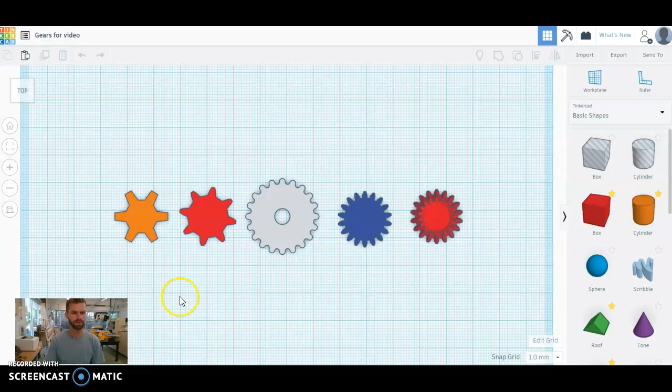When we're making gears in Tinkercad, we're not in basic shapes anymore. We're going to shape generators, go to all, and scroll down. This should be on page 3, unless something has changed. Hopefully it hasn't, and we have 5 different types of gears out here.

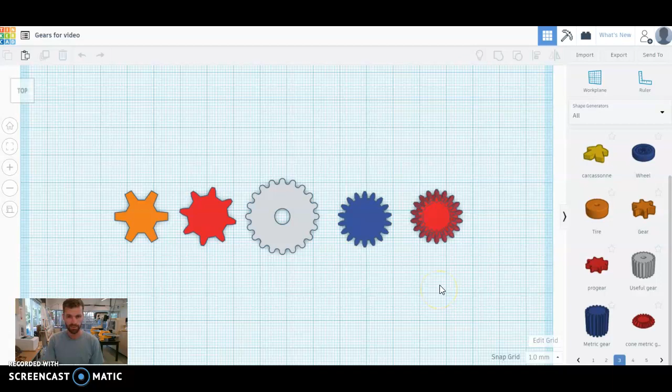You'll see 5 different types here on the right side. Most of these aren't really going to work for our laser cutter. You can see this one on the far right - this is some sort of bevel gear, they call that one. We're not going to get that. We're working in 2 dimensions, so that one's out of there.

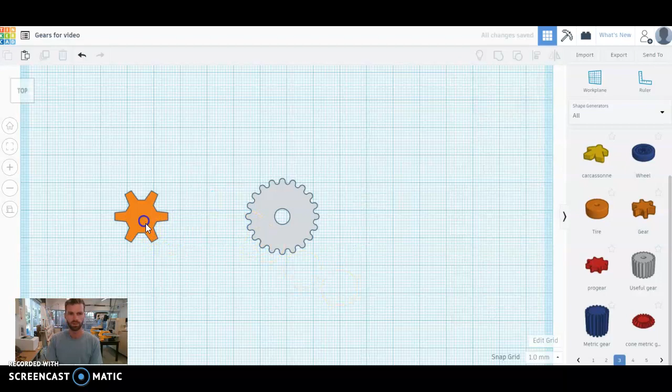That's this cone metric one here. The other ones, they look pretty good, they would work, but they don't have a center hole, so we're going to get rid of those ones too. So the only one we're actually going to be using is this useful gear. The only reason we're choosing this one is because it has that pre-made center hole there, which makes it a lot easier to design with.

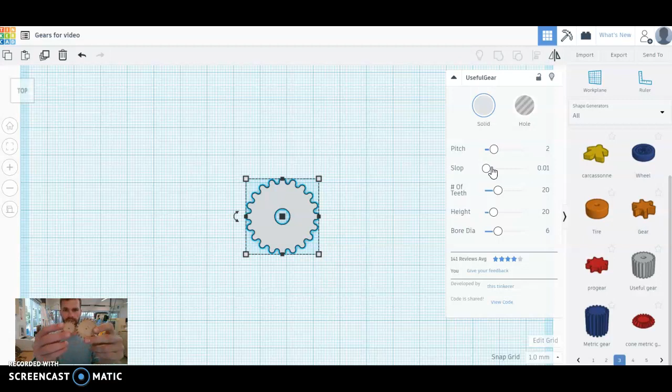Once you pull it out here, we have a couple different things we can play with. The biggest one that we need to keep the same every time is the pitch, that top number. We saw a second ago that certain gears will work together and certain ones won't - that's the size of the teeth. The pitch is controlling the size of the teeth there.

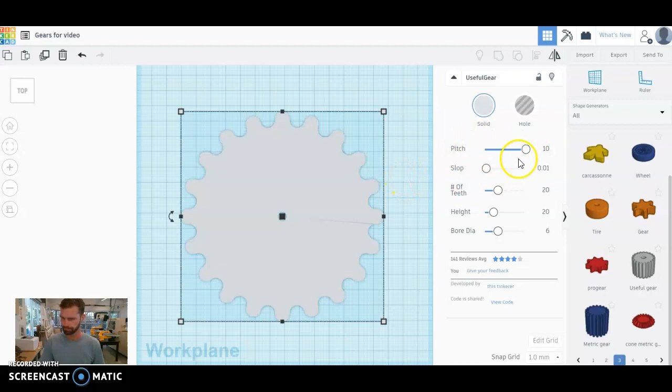So if you want to make a set of gears and you want to set it as 10, you could - just every gear you make needs to have the pitch be 10. In the future, we can look at how to make certain gears work together in different combinations, but for now, whatever you choose, let's keep this a reasonable number somewhere in there, maybe like 4 or 5 or something like that, some number that's in there somewhere.

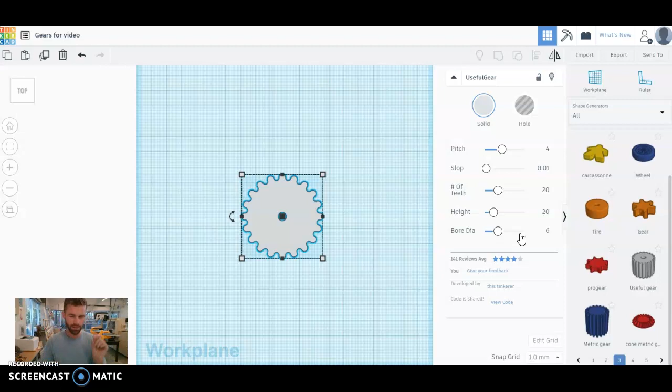We also are going to have some little tiny nails to put in there, which is going to be the bore diameter. You're going to have to measure that. Right now this is in millimeters - this should always be in millimeters. So you have to measure that so that when we put our little thumbtack or nail in there, it fits nicely. It should be a little bit extra - if you measure it and it's exactly 1, make it like 1.2 or something like that. Anyway, you can play with that number right there, and you can see that hole gets bigger and better in different ways.

Height - for laser cutter, that doesn't really matter. That's how tall it is, right? We can see it got taller there when you play with that. Don't worry about that. Number of teeth - this is the fun one, right?

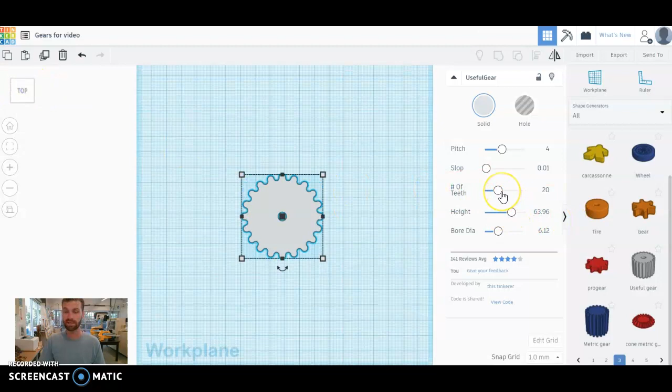So if I make a couple of these, I'm just copying this one real fast. You are going to change how big it is, essentially. If nothing else is changing, you're changing how big it is based on the number of teeth. So this ratio is going to get kind of fun and interesting here as you make a couple different gears.

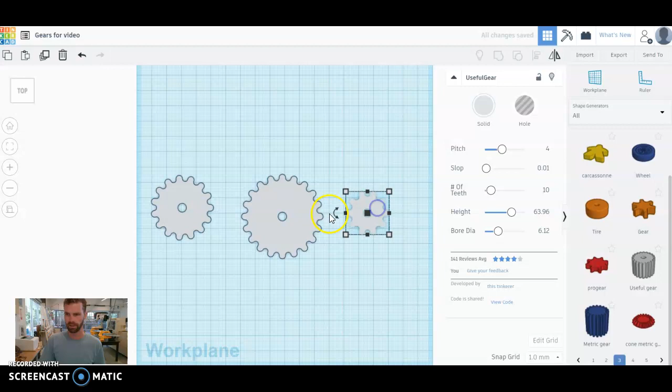And notice I'm going by 5s. These numbers are just ratios, so think like division, right? What numbers go into each other well might be a nice way to start thinking about this. We'll play around with some of these in class and you'll kind of get the feel of what these ratios are going to go and do.

Anyway, for now, that's the basics of it. When you're ready to export, let's tuck these in nice and close, not touching, but somewhere nice and close to each other. And we're going to export, but that's the basis of it.

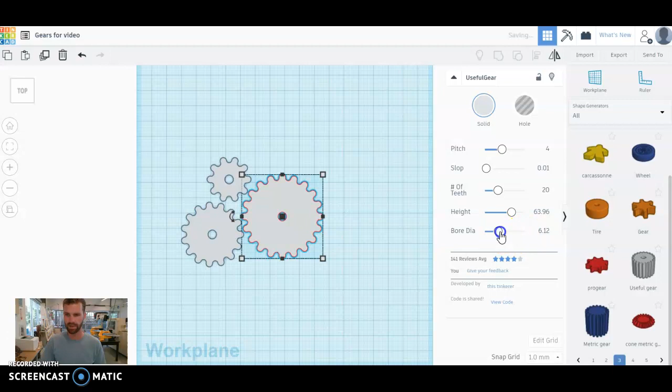Remember, your bore diameter needs to be the right size. Your pitch needs to stay constant, the same number - whatever it is, it needs to stay the same. So you can see real fast here when I change that number, those are no longer going to be working together because the teeth aren't going to mesh up correctly.